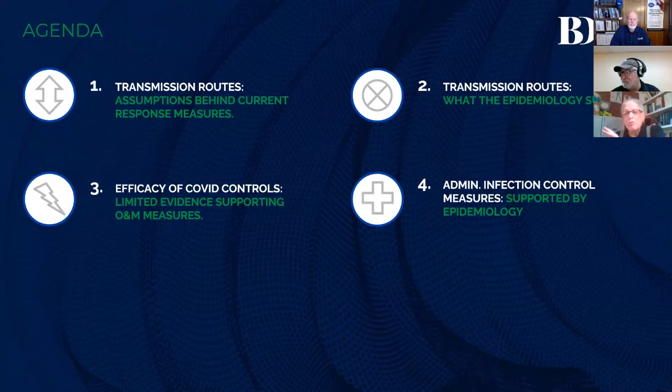And then tying these in with what I call administrative infection controls—the boring old measures that when I was in the health department 40 years ago, we knew about for infection control: wearing masks, social distancing, and washing your hands. So that's what I'll cover.

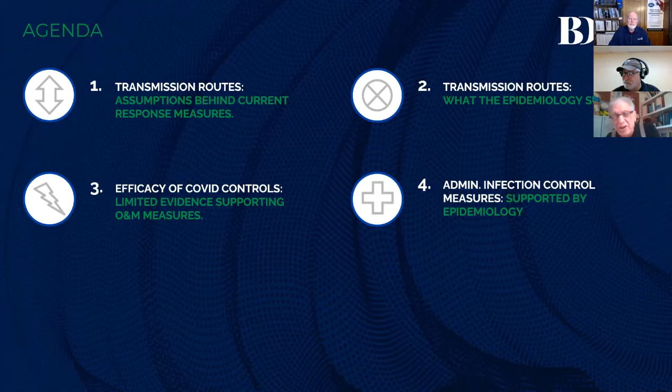And transmission paths—the way I divide these things up—the whole question started with COVID: is it airborne or not? Of course it's airborne. The important dividing point is between close range and long range.

It's basically within several feet. And then a fundamental question that hardly anybody is considering: does it circulate through the HVAC system? Is it actually discharged into other spaces? And then fomite—the surface contact.

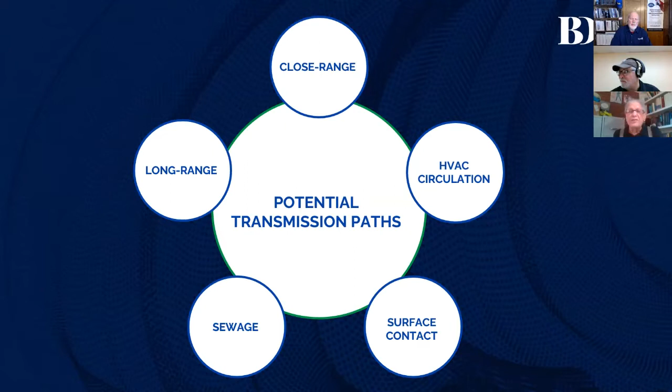I was really concerned about closely controlling this at the beginning of the pandemic, and the more I've studied it, the less concerned I am. As a precaution, we certainly want to do high-touch sanitizing as much as we can. And then the area of transmission that's been totally ignored is from sewage. So I'll go into these in the talk.

All right, let's do that. So as we know, it's airborne, but the critical dividing point is what's close versus long range. Long range certainly could potentially involve HVAC ventilation and filtration as a factor. However, close range is not significantly influenced by HVAC. And when we look at the evidence, almost all the spread is close range.

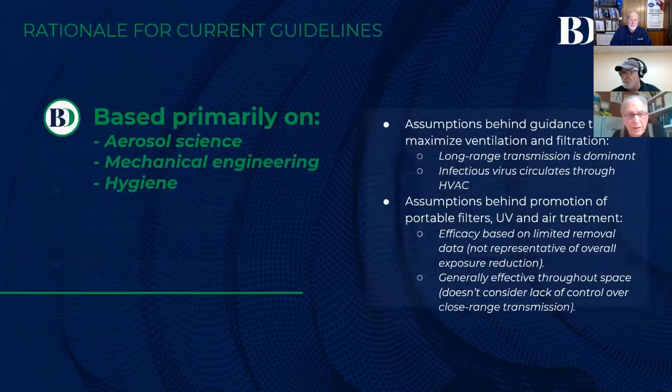So what we're doing now is primarily based on aerosol science, mechanical engineering, hygiene, and a little bit of limited actual sampling out in the field to see where the virus is. And the assumptions used to base all this COVID response in buildings on assume that long range transmission is important, and a lot of people are saying it's the dominant thing. It's also assumed that infectious virus circulates through the HVAC system, and then all the portable stuff we're bringing in.

Some technologies like UV have it well established that it can control the stuff if it's set up right. However, exposure and how it actually exposes in the real world, in a real space, really hasn't been demonstrated for any of these. And we've got a lot of stuff selling like hotcakes that hasn't even established it controls COVID, let alone reduces exposure. None of these have been shown by the epidemiology to reduce transmission, and that's what it's all about. We can't eliminate COVID in buildings, but we want to at least minimize how much it can spread.

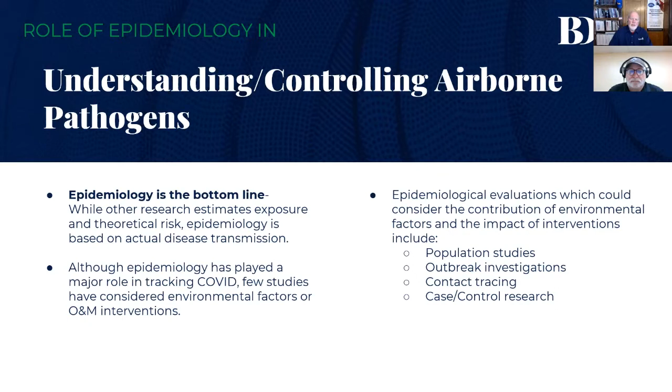Now, Ed, let me jump in here. Why do you think there hasn't been more of a focus on sampling? Is it because we don't have the technology to do the sampling? Is it because resources have been pulled in different directions?

I agree, I haven't seen a whole lot of sampling, but I thought it was because it was difficult to do. There's a real important point here that applies to lots of fields of IEQ, differentiating between what practitioners do in individual building investigations—to the extent that sampling is even relevant or helpful, it's usually misleading—and what researchers need to do to understand this. We've got a huge laboratory out there of buildings with COVID and people, a little bit of data on the total virus, but hardly any on the infectious virus. There's some good data from healthcare settings, not other types of buildings, and hardly any on infectious virus.

Meanwhile, the labs, industrial hygienists and other people who play them on TV are out there sampling, doing these tracer gas things with data that really can't be interpreted or used, in my opinion, to judge risk and help control this. So what I did recently was a literature review of everything I could find in epidemiology of COVID that would relate to this question. The literature review now has 62 references and citations, and I give you links—so if you don't believe me, go look at them.

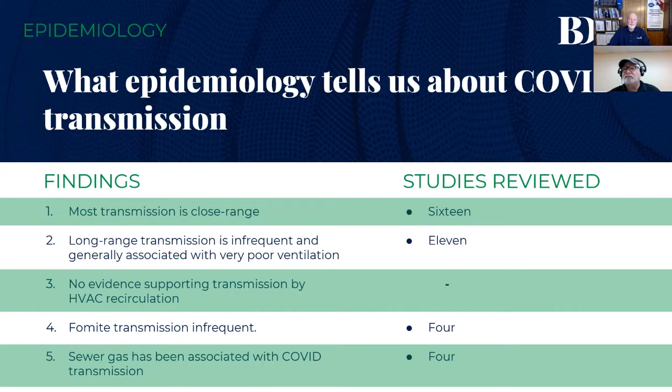So that's our literature review. What about just flushing the toilet, Ed? Anything on that? Oh my gosh, there are studies not specifically on COVID, but, and you've had folks on your show, the toilet flushing puts bioaerosols in the air and pathogens in the air, and yeah, so in fact, now you're hearing on the news all the time.

They're tracking COVID spread by monitoring the sewage in the plants, and that sewage is in the toilet. It's in the urinals when you don't have the venting right, which then you get the odors coming out. And we work on these things for IEQ all the time, and that's an exposure, and it hasn't been on the radar screen. It makes bathrooms really critical, and we want to get proper exhaust and makeup air and ventilation.

One of the things we found is the use of the electric hand dryers, which is saving trees, totally disrupts the airflow pattern of the bathroom, and if you got infected people, it just pushes the virus in between them. Let me ask you this, Ed. I've heard, and I believe there's research to show, that closing the toilet lid when you flush the toilet lowers the number of bioaerosols released during that flushing. But most public bathrooms that I've been in don't have a lid to close. Is there any evidence that adding a simple measure like putting a lid on a toilet would be helpful?

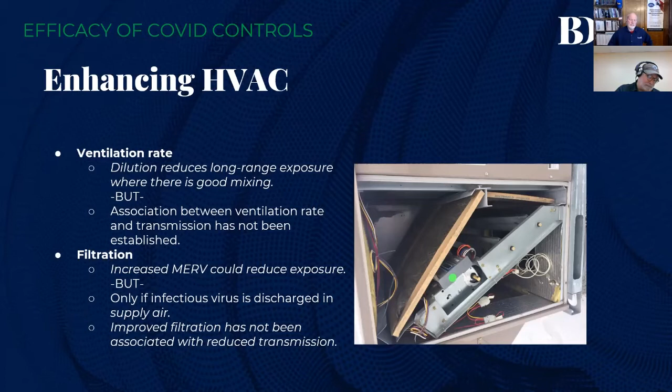Let me stop you right there for a minute, Ed. All right. You're saying it has not been associated. Could that be it has not been associated yet? The studies just, I mean, this is fairly new. Or are there studies that show there is no association?

Okay. First of all, what we're basing it on is what's been done. And there has been some stuff done. The best and about the only properly done epidemiology on HVAC circulation was in our old friend, the Diamond Princess ship, when they quarantined those people into cabins. They had actually a pretty good HVAC system with good ventilation, and it was a central system going out to all the cabins.

And the epidemiology showed that only cases that developed then were where the cabin mate in that cabin, married or unmarried, that's none of my business. But there were no cases in the cruise cabins that didn't already have an active case in there, and they were breathing HVAC air. And there's no other studies to look at that.

Okay. So now we get to surface cleaning, and one thing that's been shown very clearly is that just basic surface sanitizing, in fact, basic surface cleaning, effectively inactivates the SARS-2 until somebody comes along that surface and infects it again. And that more expensive technology and more intensive strategies for cleaning haven't been shown to reduce transmission at all.

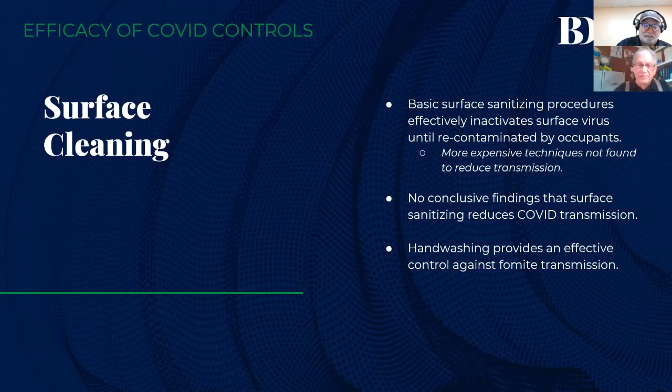And as far as COVID, there's been no conclusive findings that sanitizing reduces it. But again, my experience in environmental health and public health, as a precaution, we still want to do high touch sanitizing as much as we can, and don't forget that hand washing in some ways is a better control, because whatever sanitizing you do, it's going to get contaminated again. Okay, so you're all on board with surface cleaning, just don't overkill it, and probably don't need to use very strong chemicals. Soap and water, or maybe a broad spectrum disinfectant should be fine.

Yeah, and initially in the pandemic, I was going in the buildings and thinking of my past experience and saying, "Oh man, we're going to have to go beyond high touch points, that surface contamination could really still be a factor." But as I'm looking at the science, it doesn't look like that is, or it's relatively unimportant. And let's do a good job of cleaning high touch, and not go crazy with the other things.

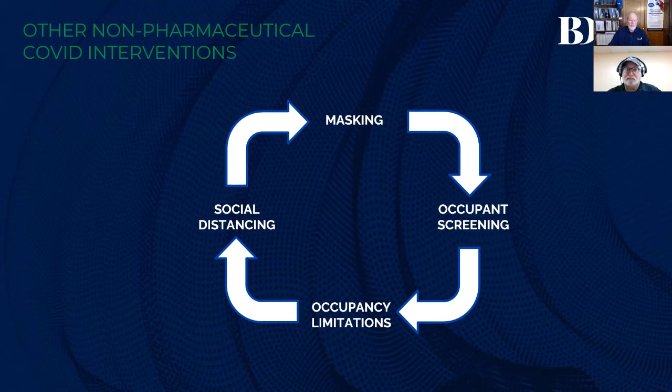All right, so Ed, we're going from the building operations and maintenance to our boring old stuff of masking, screening occupants coming in, limiting occupancy, and social distancing. And what we find here is proof all over the place and consistent studies showing that these do reduce transmission. Masking, I found 14 studies, social distancing, 9 studies. And it's interesting, the social distancing verifies that the transmission is going within several feet so often, because when you implement those controls, the infections go way down.

Screening the occupants for are they vaccinated, are they positive, immediately quarantining and contact tracing, that really makes a difference in the building. I'm seeing that there was actually more attention to it earlier in the pandemic, and that's kind of sliding now. Those are administrative things that can really make a difference in spreading it. Not sticking up air treaters and cleaners that sound good and have good advertisements.

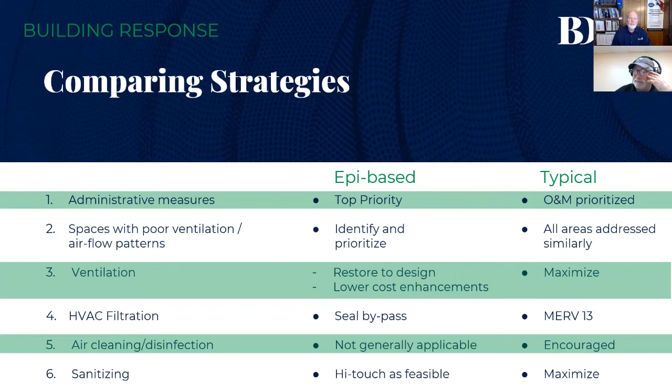As far as HVAC filtration, the emphasis all over the place has been MERV 13s, increase your central filter efficiencies. That sounds good in theory, but in our experience, and you'll see in our school study if we have a chance to get started on that, filter bypasses, if you look closely, are all over the place. That's no filtration at all. Simply going through, finding them and sealing them.

That's a great bang for the buck. It's going to improve filtration. And again, we don't even have evidence that that's a route that COVID's spreading. The other couple things here that are being done typically is they're promoting air cleaning and air disinfection.

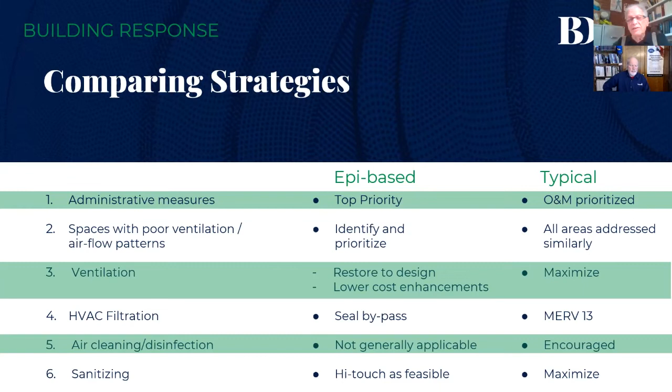And we're saying it's not generally applicable. There may be some places where proper use of portable HEPA filters could help, but all this, we're saying it's generally not applicable. Again, I've said this: sanitizing high touch to the extent feasible and frequency, what you can afford when people are in there, and what typically is done is maximizing that. All right, that's a good summary.

So, in conclusion, epidemiology has generally not been considered in the IEQ community's pandemic response. Researchers have failed to provide critical data needed to guide effective response. Practitioners have misdirected resources to measures not established for transmission.

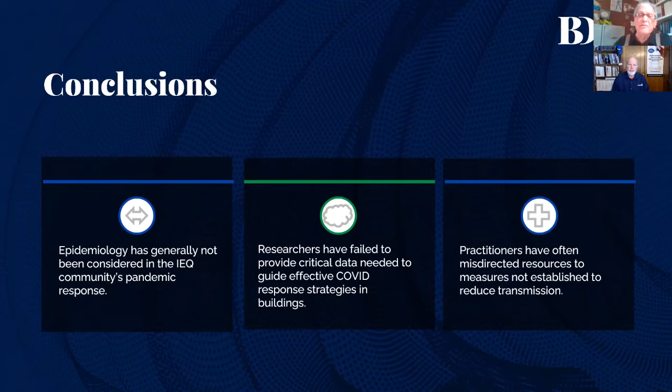So I closed at the conference saying, now that I've offended everybody, I'm done, because it's researchers and practitioners. And yeah, this stuff should and could be done better. And other people are making money on this, and we're plugging away with basic engineering and IEQ.

So that's it. Understood. And your final recommendations are: research should focus on determining the prevalence of transmission routes and the efficacy of response measures. I like that. And the response strategies in buildings should focus on measures established to reduce transmission.

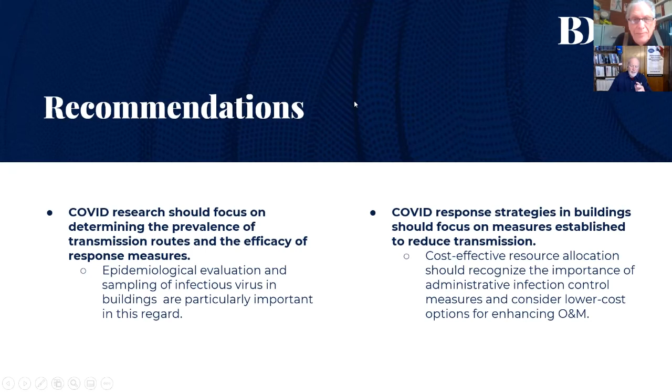All right, Ed, I think that's a good overview of that first one. Let's go to your second one. Sure. And while you're setting that up, what I'm going to do is we're going to go to the Roundup, and then we're going to go through, I think it's pretty quick, your comparison of MERV 9 to MERV 13. All right, John, let's go to the Roundup.

Well, let's see if we can't help with that, Ed. All right, you've got another document up here. I think we can pretty much quickly go through here, but you're comparing MERV 8 and 13 filters at an elementary school. Give us kind of the background real quick, and then we'll take it from there.

So actually, one of the school districts we work with gave us an opportunity to do a very controlled study on virtually no budget, comparing different kinds of filters. And the school is split up into a bunch of small HVAC zones with several similar classes with similar rooftop units.

Here's the roof. The question the school district had, back in 2017, was this: it's widely promoted and marketed that you've got to go to higher efficiency filters. So they wanted to know, is higher efficiency filtration needed to protect health? Does the indoor air quality improvement justify the higher cost, since you're removing fine particles from the air?

This became super relevant in 2020 when ASHRAE and the general recommendation said to go up to MERV 13 if you can. So the scope of our study—we were given one year. We put in 10 zones with different MERV 8 and MERV 13 filters, and in one zone we used one of the most popular air cleaning systems instead of a filter.

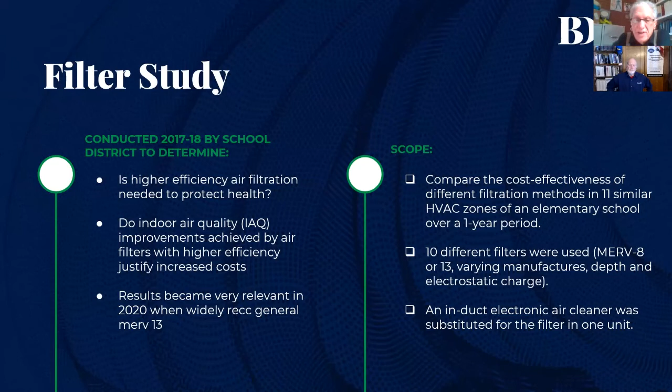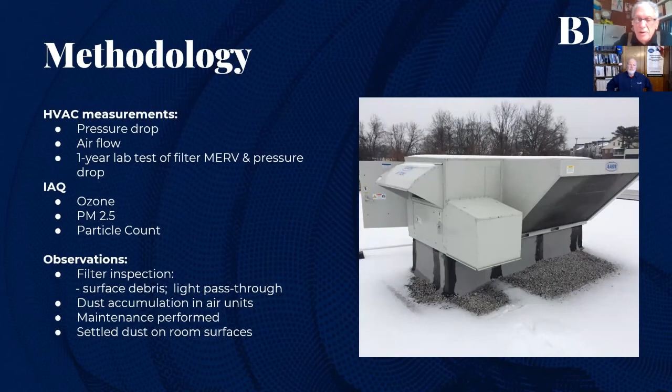We looked at them periodically and tried to do a whole bunch of tests, but our observations ended up being more important. We're not a funded research study with unlimited ability to get enough sampling to mean anything. We did do ozone testing, sufficient to find that our device did not discharge ozone, which was about the only good thing I could say about it. Part of the study was very informative.

We took all the filters at the end of the year and sent them to a lab for ASHRAE-type filter testing to compare after a year with what they did originally. They simply retested the MERV efficiency of the filter with the challenge, and we got a good accurate measure of the pressure drop through the filters.

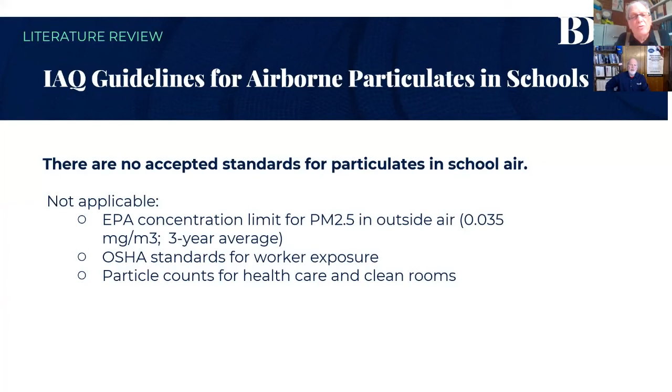The really neat part of our study was we were funded with a few hours to do a literature review—what do we actually know about this? First of all, there are no accepted standards for particulates in school air. Most of the studies address outdoor particulate matter.

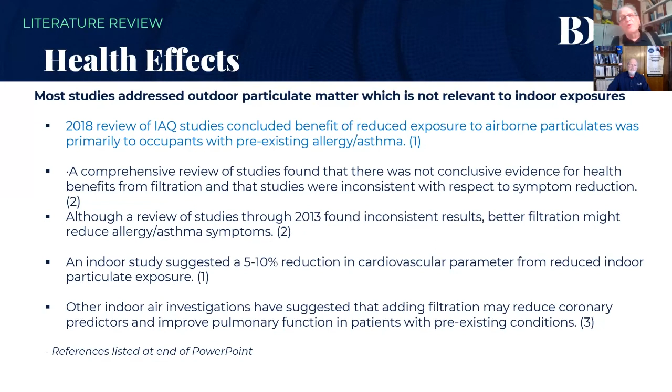If we can make it available, my PowerPoint includes references at the end to some of our conclusions. The bottom line in the indoor studies was that by controlling particulates better, there was a predicted improvement for occupants with pre-existing allergy and asthma. One study looked really good, showing fine particulate control was making a health improvement, but then you look in the fine print—that was Beijing, bringing in one of the world's most polluted air through the filter.

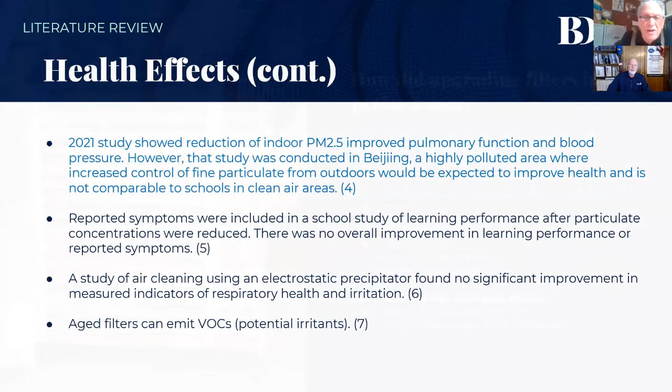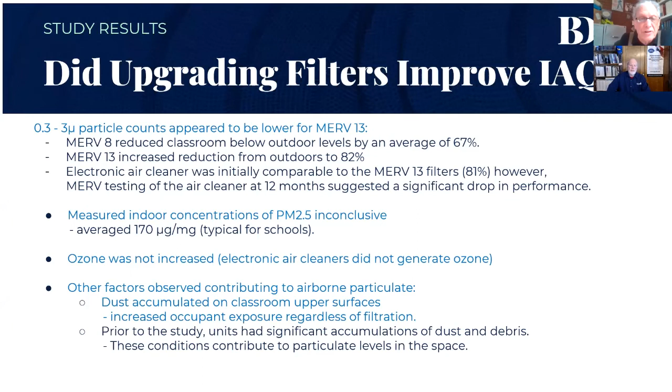One thing that was interesting was we retested the MERV rating and found it went all over the place. Some of the MERV 8s went up towards 13, some of the MERV 13 filters dropped way down. For the pressure drop, we found that the air cleaning system had dropped so far it was eventually useless by that time. And it was $1,700 extra cost over filters to install—lots of these have been installed around the country.

So our bottom line on health was: research is insufficient to say that occupant health will be improved, except where a school is located near a major outdoor source of air pollution. There's a classic study of a school in New Jersey immediately next to a 16-lane highway. The school we were studying was out in the country, in a rural area. So we told the school system that continued use of MERV 8 filters is acceptable from a health perspective, at least in the school we were at.

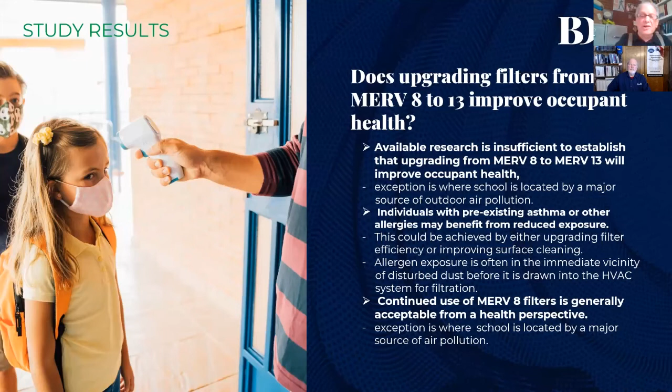The engineer running this part of the school system was very much in agreement. Then, ironically, COVID hit, and against his recommendation, due to pressure from the public and politicians, he had to upgrade everything to MERV 13, which cost us taxpayers $300,000 a year. But anyway, interesting.

It kind of contradicts itself here—you go back and say the upgrade did seem to have an effect for kids with allergy and asthma, but not an effect overall. I'm a little confused there. Oh, okay—so we didn't do a health study as part of this, but looking at the available studies, reducing particulate really has a potential health benefit. However, one of the biggest impacts we saw in monitoring these schools for the year was that this school had horrible custodial work, though I do see good work by some custodians.

The rooms we were studying just accumulated dust over the course of the year, and you don't see it. It's all on the higher surfaces, and that represents a significant exposure that could be prevented. And that exposure doesn't even go through the HVAC filters.

The allergens, the bigger particle ones, are pretty well controlled by the lower MERV filters. The finer ones, yeah, they are controlled better.

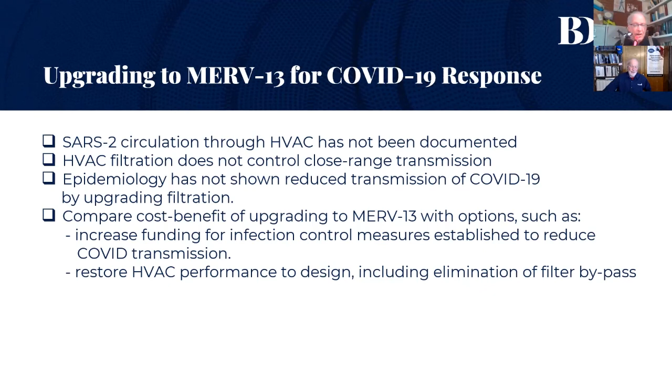Ed, being close to Washington, D.C., in that beltway, did you find that, number one, some schools never spent the money? And number two, some schools spent the money on teacher training and critical race theory and stuff like that, rather than putting the money into the schools?

Oh, that absolutely. And this is the United States. Some school districts with richer people are more funded. However, maintenance budgets, custodial budgets, keep going down, and you simply look at the cleanliness of the schools and the functioning of the HVAC. This is all over the place.

And then billions were pumped in through COVID, to be used, encouraged for ventilation. And most of those funds have been put into the stuff that I'm saying hasn't been shown to be effective.

And the administrative stuff, the screening, the social distancing, controlling the occupancies, and paying attention to the community infection rates for how strict you want to go, that stuff costs. I'm afraid the money going to extra doodads for HVAC and fancy sanitizing around the clock is taking money out of that.